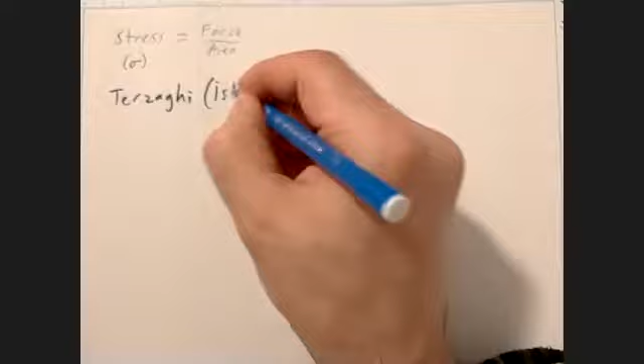This worked to some extent, but people needed something more to model the behavior of soils. So for that purpose, what the person viewed as the father of soil mechanics, Karl Terzaghi, came up with is this. A little interesting bit of trivia: he was working in Istanbul, Turkey in the early 20s, so you can consider soil mechanics was kind of born in Turkey.

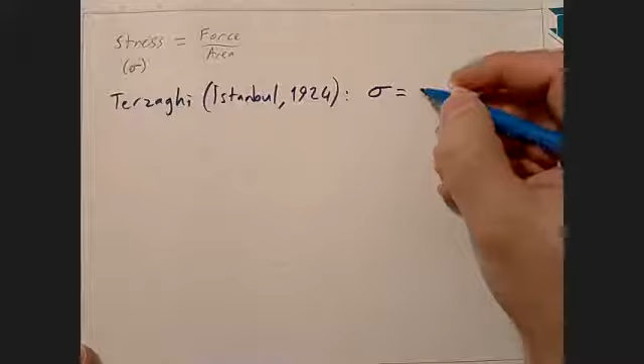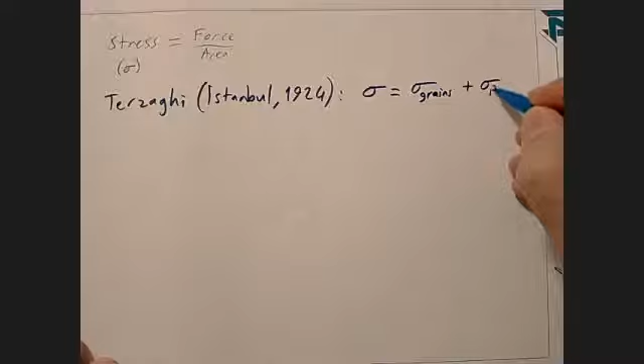He considers the total stress in the soil has two components: a stress component carried by the grains, and the rest carried by the pore fluids.

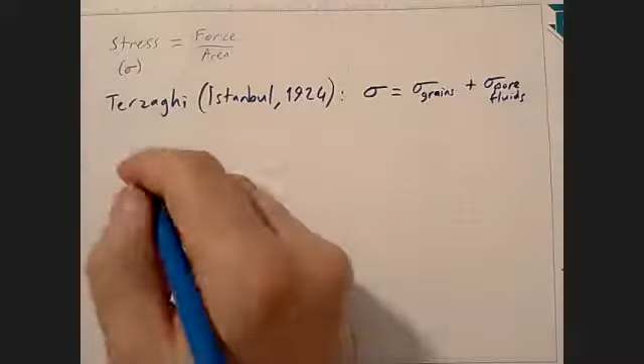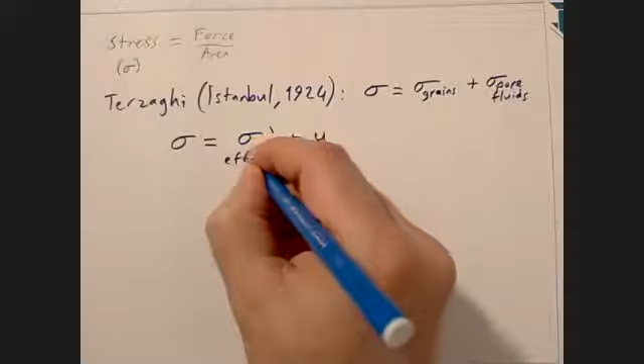Actually, he didn't say that, he didn't write it that way exactly. What he wrote, what he postulated, was this: where this first term, the sigma prime, is the stress carried by the grains, and he called that the effective stress. So it is the stress carried by the grain matrix or solid skeleton.

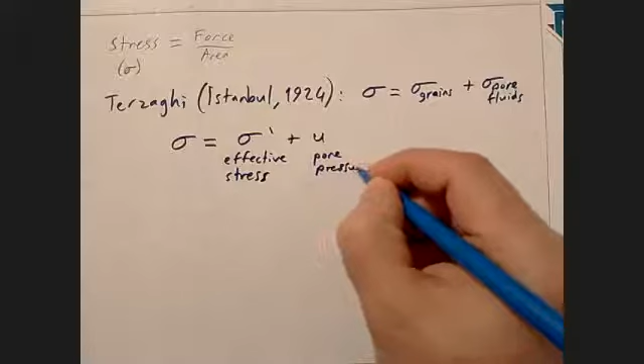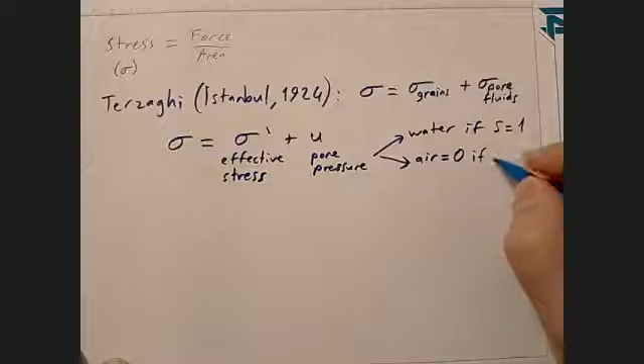And this is the pore pressure. He separated that into water, if saturated, and air pressure, which is zero if dry.

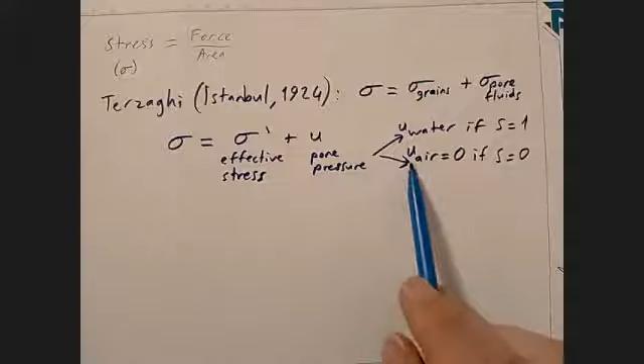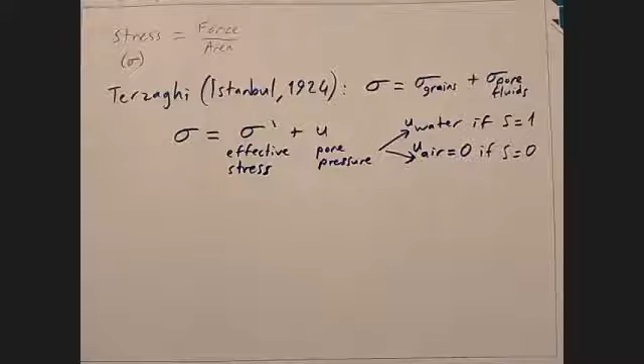Let's write it this way. Quick side note here: when we say pressure of air, of course pressure of air is atmospheric pressure, which is around 100 kilopascals. But that's for scientific calculations. If you are going to use the ideal gas law, you need to consider air pressure to be 1 atmosphere. But for engineering and mechanical calculations, you can use gauge pressures as well.

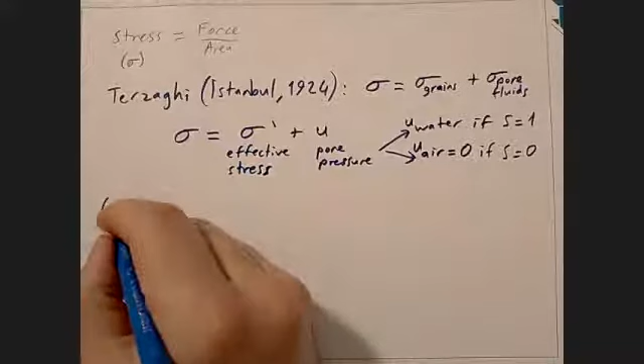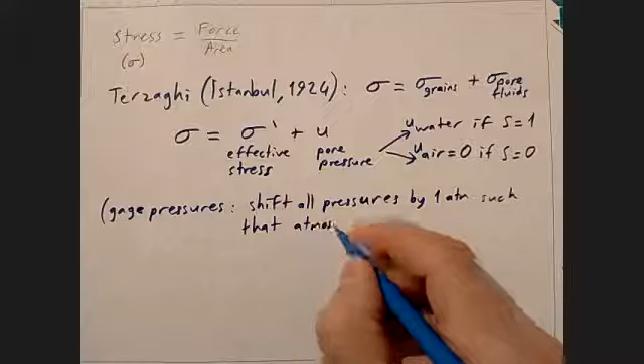Gauge pressure shifts all pressures by 1 atmosphere, such that atmospheric pressure is 0.

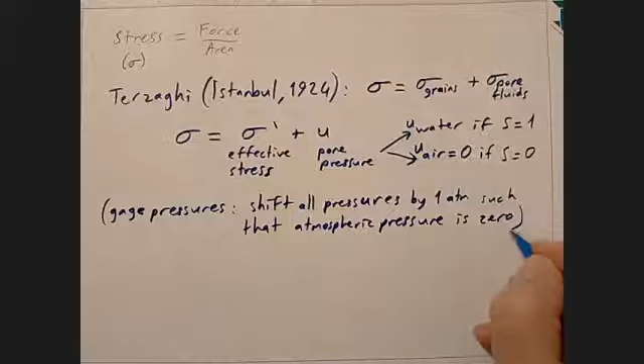The purpose of this is because when we are analyzing conditions where the air pressure isn't going to change, which is usually the case for many civil engineering projects, there is no point in adding one atmosphere to everything. You have one atmosphere inside the tank, one atmosphere outside the tank - they are going to cancel anyway. All those atmospheric pressures are always going to cancel. So for that purpose, we use gauge pressures instead of absolute pressures.

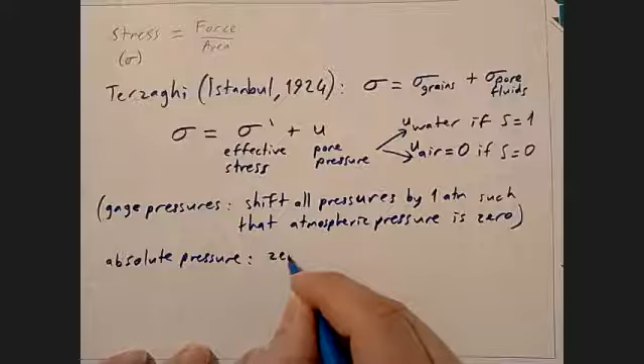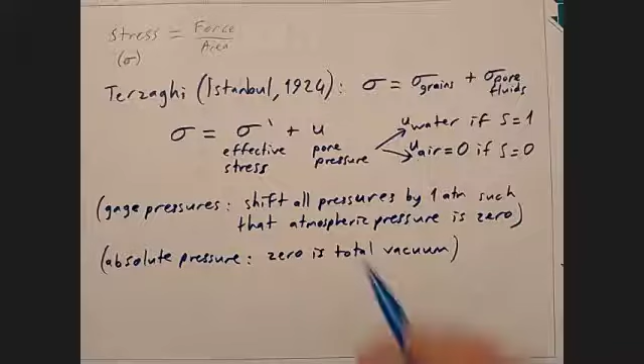Absolute pressure is what you learn in science, where 0 is total vacuum. So we shift all absolute pressures by one atmosphere.

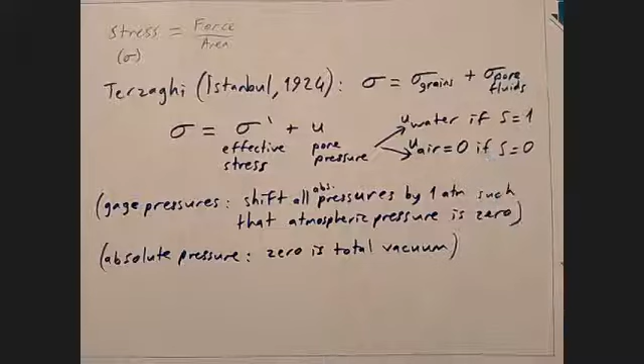That is why if you have dry soil, the pore pressure is 0 - because yes, it is one atmosphere, but it acts on all grains from all sides equally, so it is going to cancel for every grain.

So what about effective stress though? Effective stress has the solid skeleton's contact stresses involved, and also a double layer repulsion component.

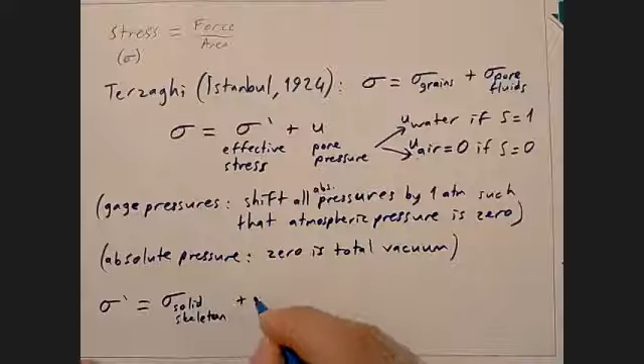Remember, when we were talking about clay particles' ability for holding water, we discussed these double layer cushions of water, and said these cushions can transmit stress from grain to grain without the grains touching each other. So that's what this is - if two double layers are pressed against each other, they are able to carry this stress without the solids touching each other.

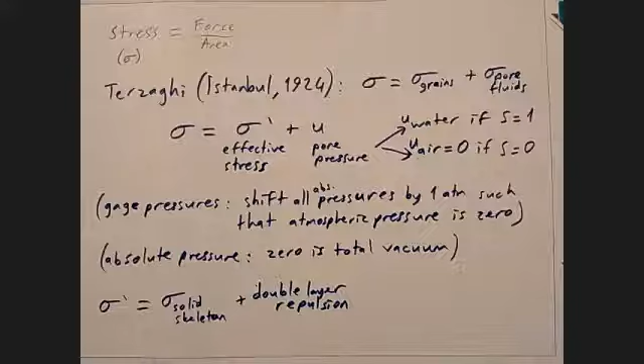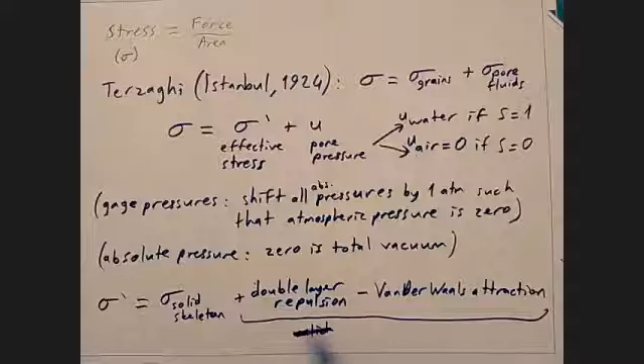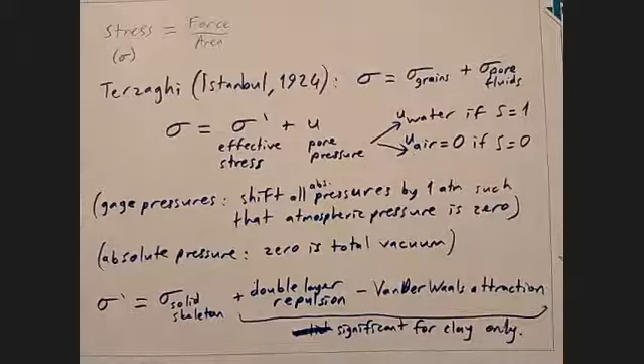When you go down to clay scale, this even becomes significant - of course, these two are significant for clay only. But anyway, in the end, the overall meaning of this is that it is the stress carried between the grains.

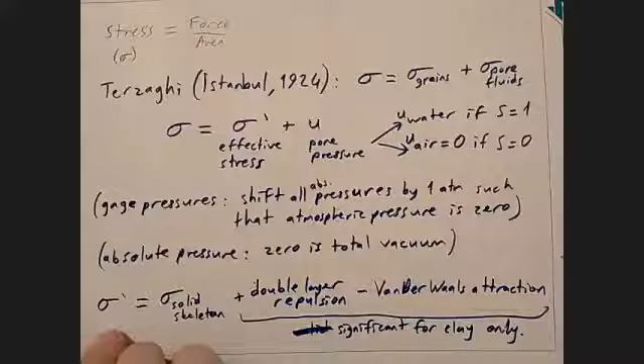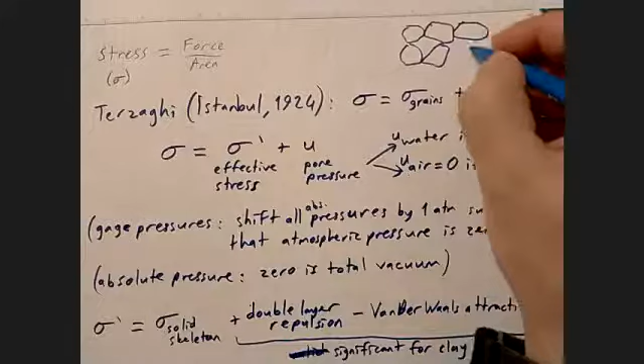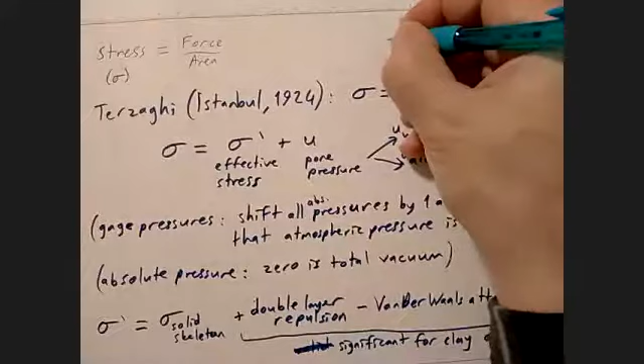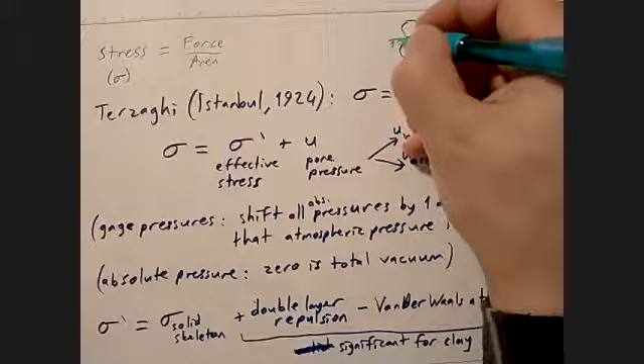So basically, it is something like this. So you have these grains for a granular soil, you can think of it as such. You can consider over this area, you are going to have your fluid forces, and imagine contacts are infinitely small, so they occupy almost no area there. And then you also have these contact forces.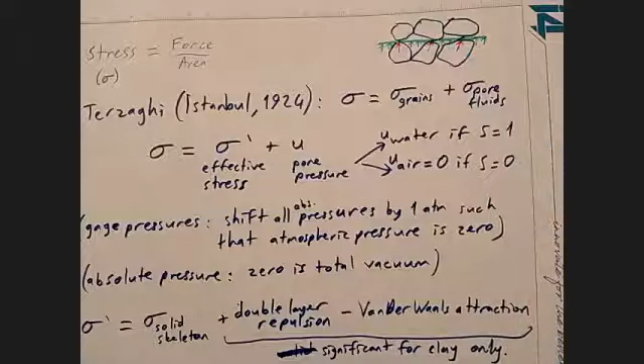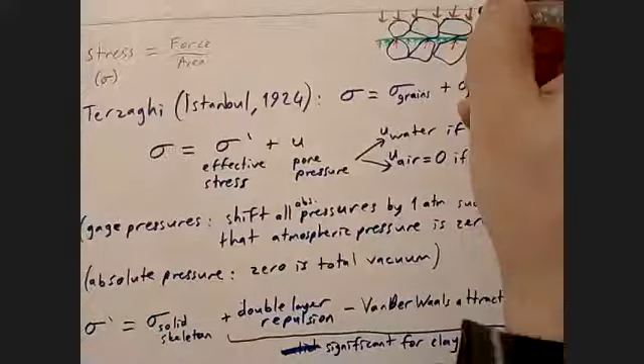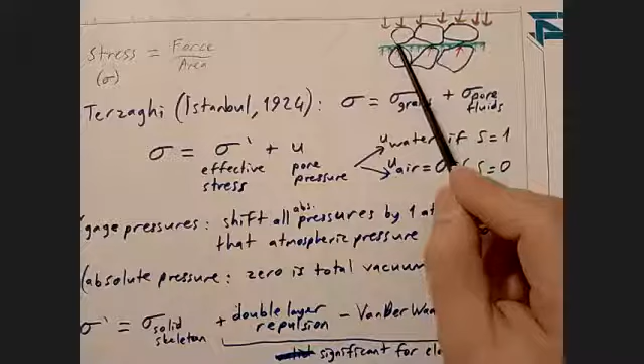So you can consider the total stress carried by the soil is going to be the stress acting on the entire soil area. And as you can see from this figure, the pore pressure, the pore water, or actually air as well, also acts on the entire soil area. So the way the effective stress is defined is it's also defined over the entire soil area. So it is not the stress inside the solid of the grain. It's not the stress at the contact. It is kind of like the resultant of all these contact forces divided by the entire soil area. So it is like average stress. That's how you can superpose stresses. They have to be acting over the same area to make this superposition.

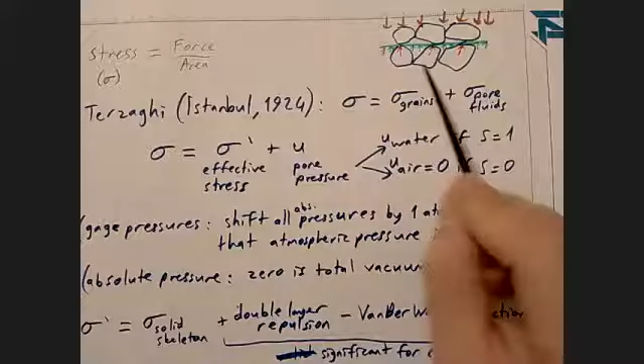So keep that distinction in mind. It is not the stress in the solid. It is more like a conceptual stress that is a component of the total stress in the soil. So that's why it's called effective stress.

So how do we calculate it then? Let's consider a column of soil like this.

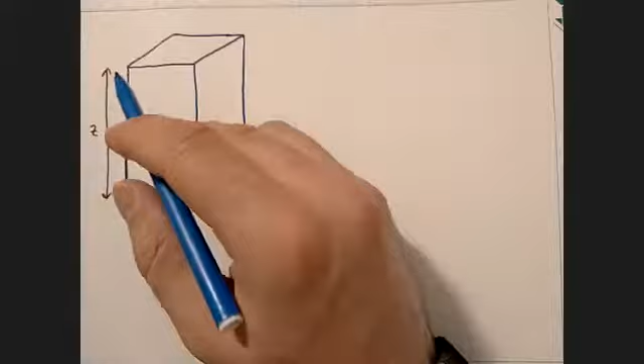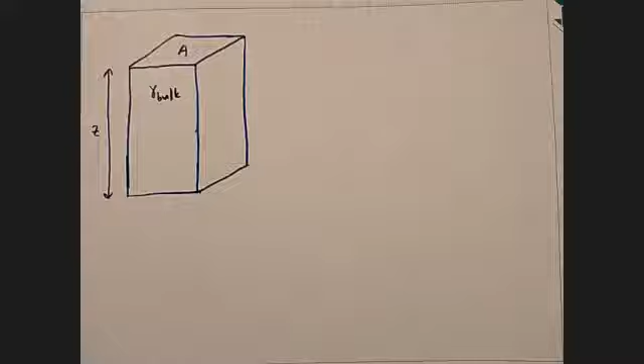So here is my column of soil. And let's also put some dimensions here. Let's have it this much deep, and let's have it with an area of A, and let's have it with this much unit weight. And also let me do this so that it looks like a rectangular prism. Okay.

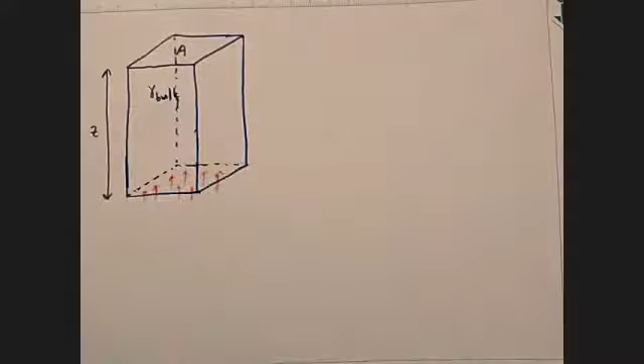So let's say we would like to calculate or figure out the stresses at the bottom, the vertical stresses. So the weight of this soil is carried by the vertical stress. So I can write directly that vertical stress is weight over area. And here for this particular figure, by the way, I'm going to be writing many equations here, but they aren't formulas or anything. They will be specific to what I draw.

So the weight of this is volume, Z times A times unit weight, divided by area A. Look what happened. It becomes Z times gamma. So wait a minute. The total vertical stress is calculated similar to hydrostatic pressures of a fluid. That's interesting. So you can pretend the soil was a liquid with that same density, and then your vertical stress calculations would still be the same.

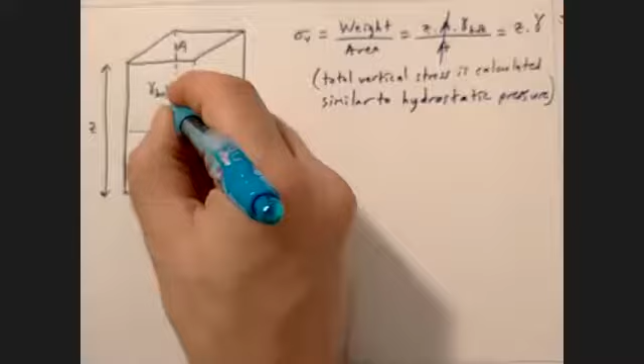Now, let me add a level of complication to this. Let's add groundwater to this picture. This icon, this mark, designates the level of the groundwater inside the soil. And let's have it at a depth of, or at a height of ZW. Actually, we are talking in terms of depth, so let's call this ZW, so this would be Z minus ZW.

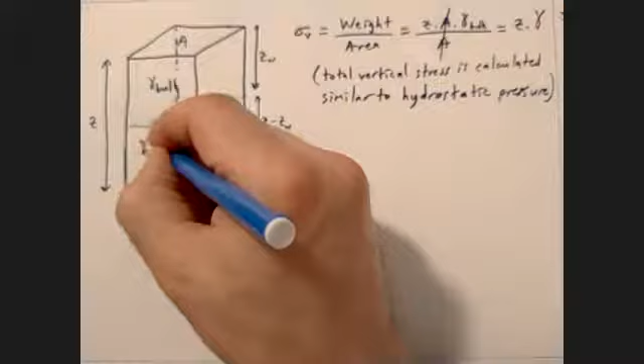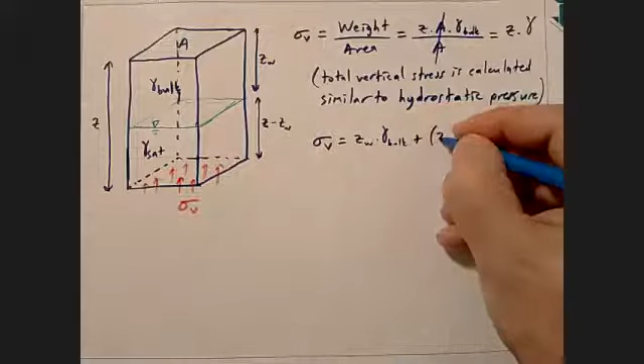Let's look at this again. Now what have changed is, first of all, we changed the unit weight down here. Now the unit weight down here is gamma saturated. So my total stress becomes sum of all weights divided by unit area. So the area is always the same, so the area will always cancel out. So what we have now is this.

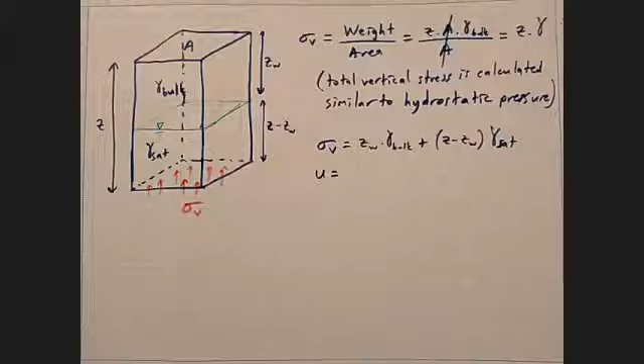And how much is the pore pressure down here? Now we are at this depth from the water surface. Now, yeah, there is soil inside that as well, but the soil grains there, they are just shaping the pores for your fluid. So actually it is just like a very intricate container in which you have water. So your water pressure will also be this depth times density. So it will be Z minus ZW times gamma water, which makes your effective stress, vertical effective stress, which is, as Terzaghi says, this much.

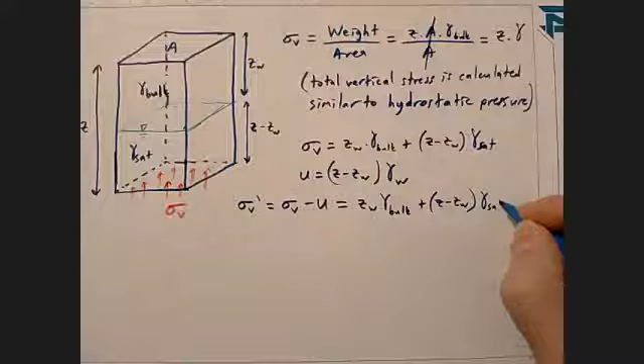And if you subtract from that, if you subtract this, you end up with ZW gamma bulk plus Z minus ZW gamma submerged. So that's called gamma submerged here.

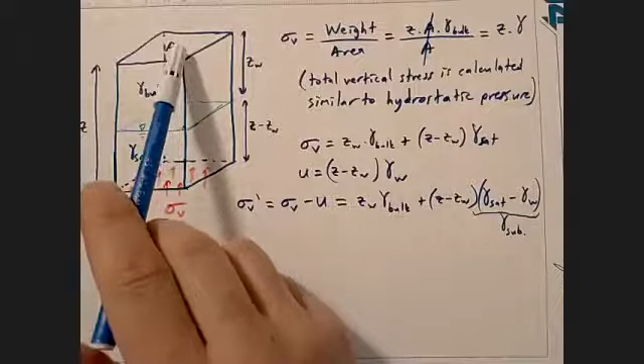Let's see what we have done here. Let's add one more little detail. Imagine if you had some additional load on the top, what would that do? It would just increase the total stress.

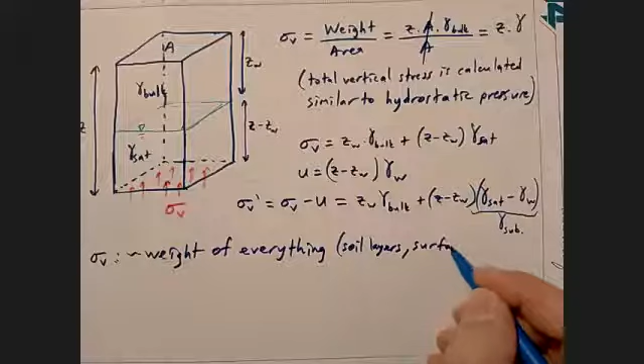So the vertical total stress is weight of everything above, and with everything, we mean both soils and loads.

U, as we already said, 0 for dry, hydrostatic for saturated.

But let's put a note here. I said hydrostatic. What does that mean? Hydro, water, static, stationary. If the water is stationary, unless there is flow.

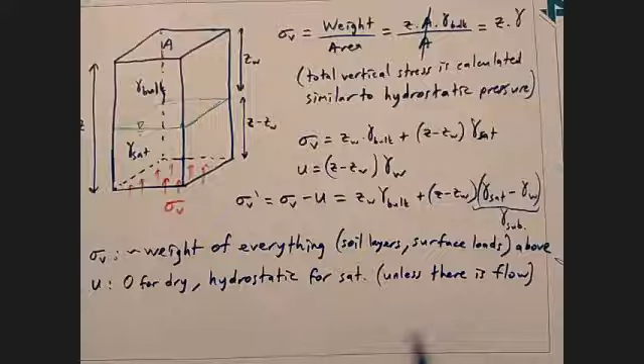So I'm going to leave it at that right now. We haven't covered the flow chapter yet. Once we cover the flow chapter, we are going to go into that as well. But right now, until then, we are going to be looking at only hydrostatic groundwater problems in this section.

And the effective stress is always this. Why is it so? Because it is defined as such. Remember, effective stress isn't some real stress that you can measure somewhere. Its definition is this. So this concept is called Terzaghi's effective stress principle.

So this never changes, unless in some cases it does. But anyway, for this course, this is going to be the case. When does it change?

If you have noticed, I always kept writing for pore pressure, 0 for dry, hydrostatic for saturated. But what if it is something in between? Well, if it is something in between, this doesn't hold anymore. So if it is a partially saturated soil, unless the soil is partially saturated.

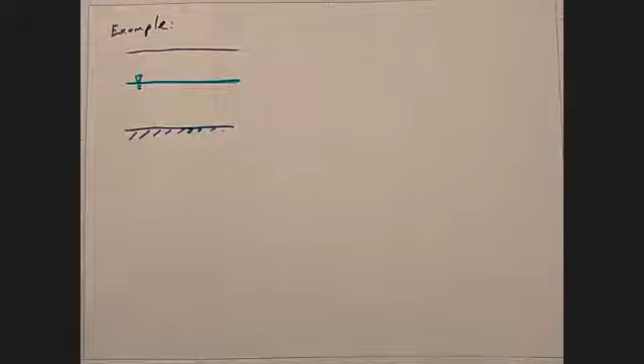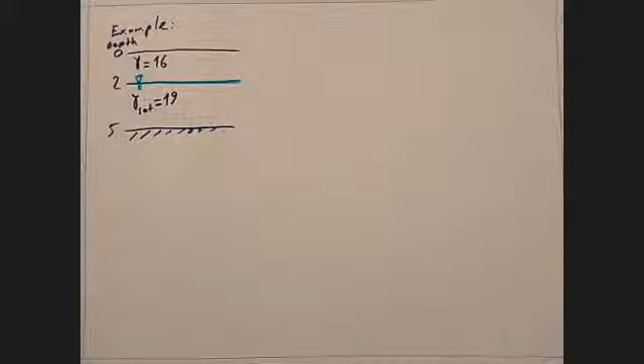So here is my water level, and here I have some soil where up here my unit weight is, let's say 16. Down here the saturated unit weight is 19. And basically here is the depth scale, depth in meters, 0 to, let's say 5. So let's say this is the end of our problem. Actually, it doesn't have to be an actual end of layer. It can simply be the depth up to which I want to examine this. So actually you can even consider it like this.

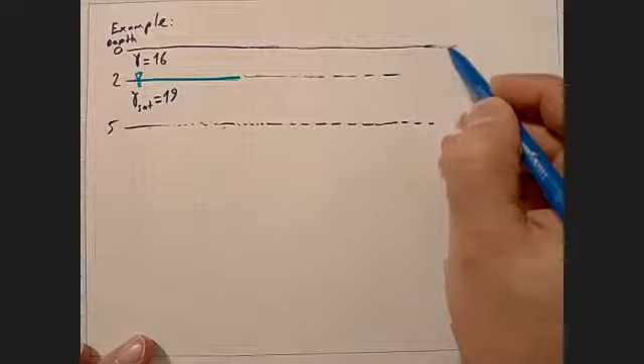So the question here is going to be, calculate everything at all depths. So calculate the vertical total stress, effective stress, and pore pressure at every depth.

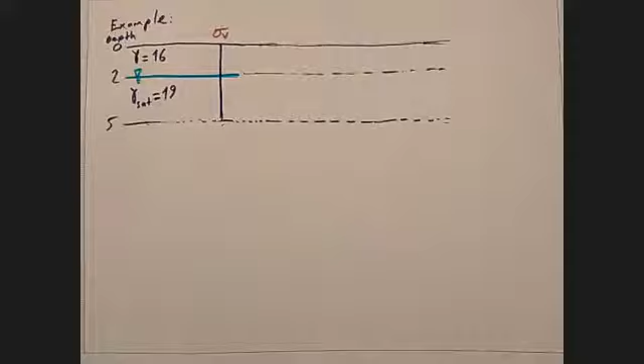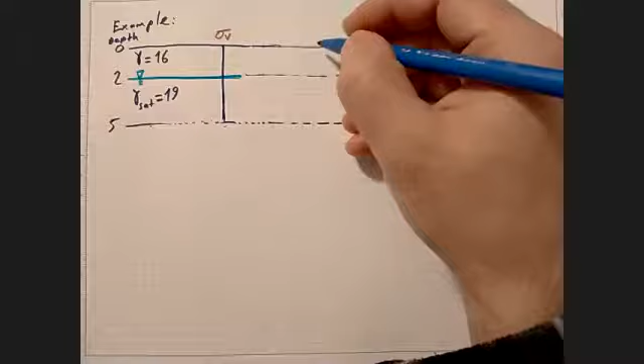So let's start with total vertical stress. And we can do that. The best way to do that is as a distribution over depth. So yeah, for a specific problem, you can end up needing the stress values for only a single depth. But most of the time, for most engineering problems, it's going to be much easier to visualize things and follow what is going on if you consider things in terms of a distribution.

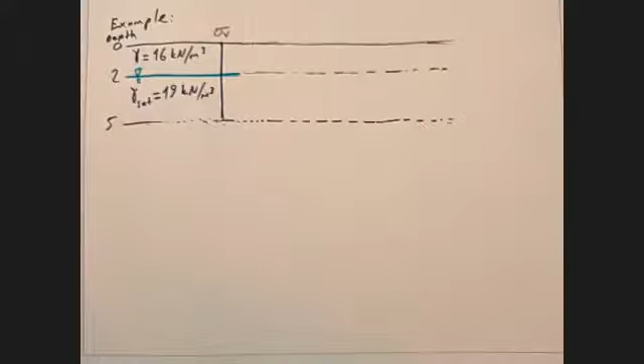So at the very surface, there's nothing above that. So the weight is 0. Weight above is 0. So the total stress acting on the surface is 0. Then as I go down, for every meter depth, I'm adding a unit weight of, I'm adding a weight of 16 kilonewtons. So per area, that would make 16 kilopascals. So in 2 meters, I'm going to get 2 times 16, 32 kPa.

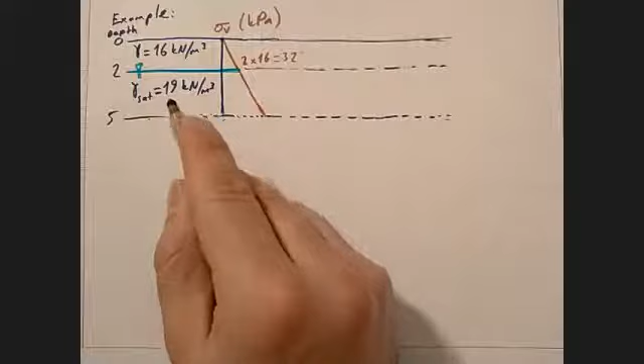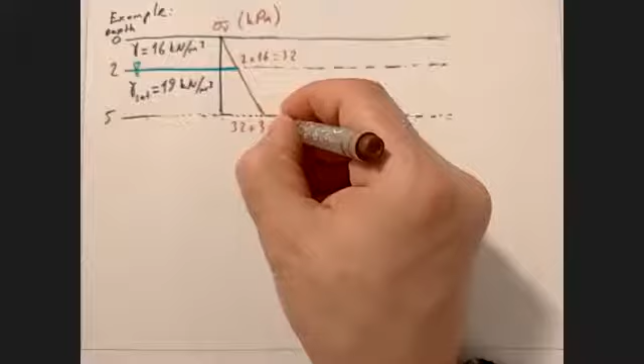And then beyond that, between 2 and 5 meters, at every meter I'm getting 19 kilopascals added to the equation. So 32 plus 3 times 19. What's that? 57, 89.

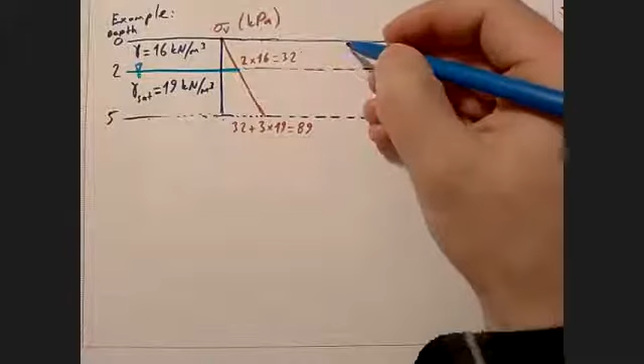So it is still just like fluid pressures, but instead, this time you have two immiscible fluids that have different densities. So imagine you had water and oil on top of each other, and then this would still be how pressure in that fluid would be distributed.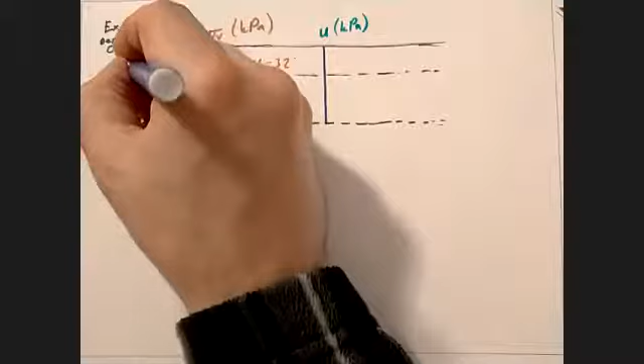So next, let's consider pore water pressures. Everything will be in kPa, all the stresses, because all of them are stresses. So up here, where the soil is dry, your pore pressure is going to be zero. Remember, if it is just air, it is zero.

And then below here, basically this little sign, this triangle, upside down triangle with its reflection, it always tells you at this level water pressure is zero. So here it is zero as well. And then the rest is hydrostatic.

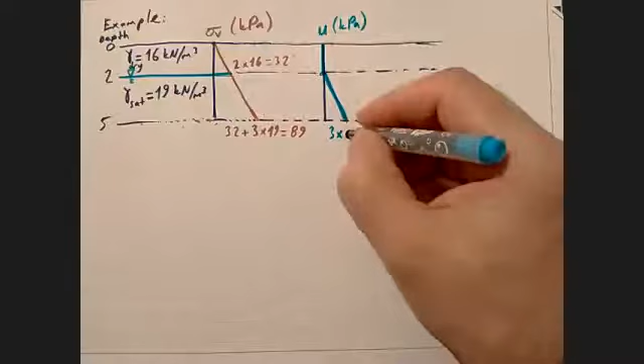Therefore, 3 times gamma water. In this chapter, I'm going to be using 10 for gamma water for simplicity of calculations.

If you want to be more precise, you can go ahead and use 9.8. By the way, a little side note, using something like 9.81 or 9.807 is going to be more precise, but not more accurate, because here in Ankara, due to our latitude as well as our elevation from sea level, the gravitational acceleration is much closer to 9.800 compared to 9.807.

Just an additional little trivia.

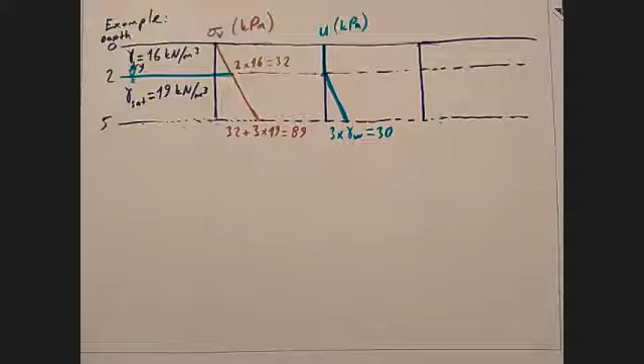So finally, let's look at the vertical effective stress in kilopascals. This one is always going to be total stress minus pore pressure, as we said. So here it goes. Here it is 32 minus 0, that's 32.

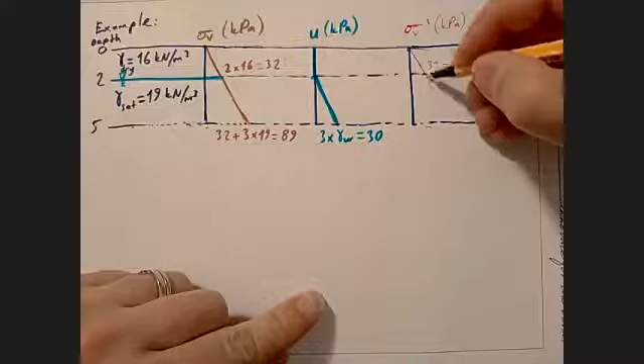And then the slope changes, because up here it was going at a slope of dry unit weight or bulk unit weight. Here its slope is the submerged unit weight. Why? Because I'm subtracting from the saturated unit weight sloped line, a line with a slope of gamma water. So the result is a line with submerged unit weight.

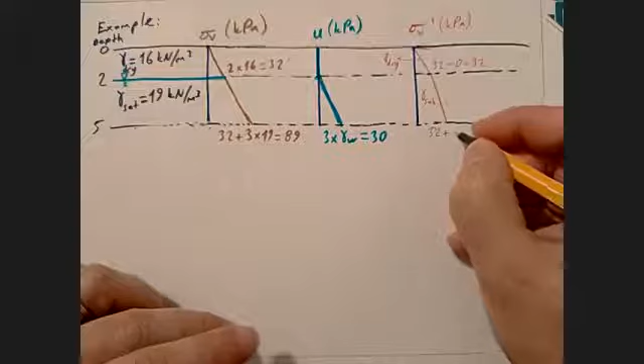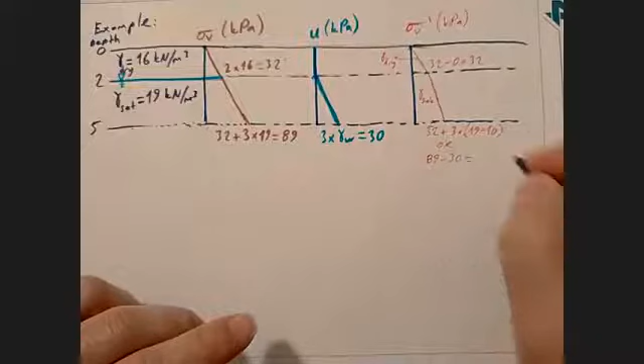You can either think of it that way, so that would be either 32 plus 3 times 19 minus 10, or you could also think of it as Terzaghi's effective stress principle, which I really recommend. It is much easier to think that way. And either of them are going to make the value 59.

So this is basically what we are going to be doing in this chapter, but right now it looks very straightforward, though there are many other possible complications I could add. So let's add a few more of them.

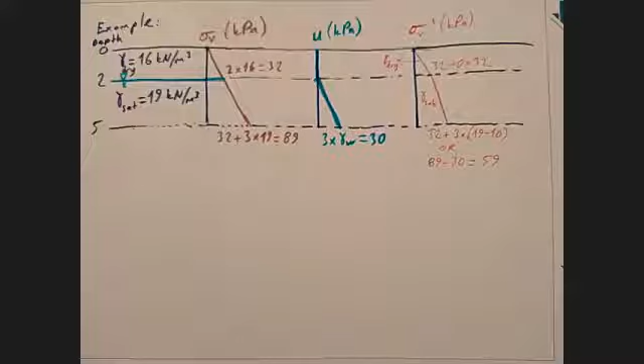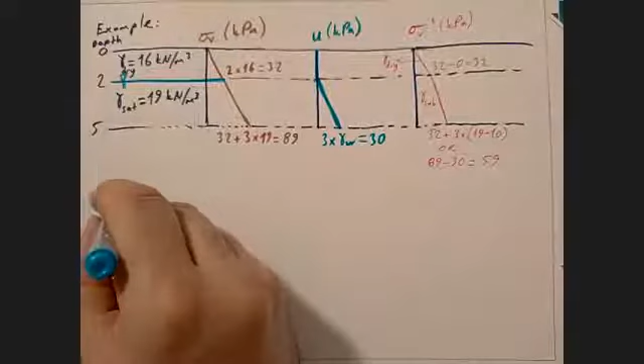Now, another example is, what if I have this? Let's say I have some sort of water body, let's say it's a lake, and this is a 2-meter deep lake. And then let's do our calculations down to, again, 5 meters.

So actually I'm giving the same geometry, but this time I'm just switching such that you have just water here and soil here. And let's use the same gamma saturated. So let's do the same exercise here.

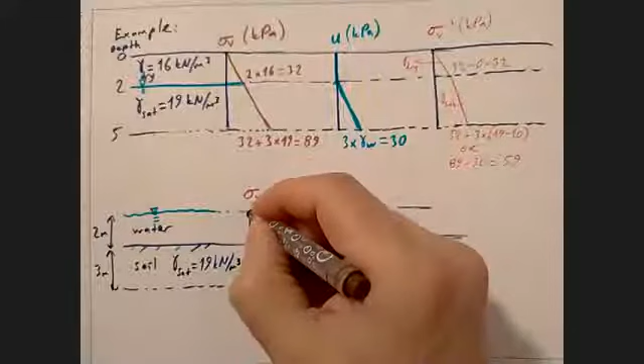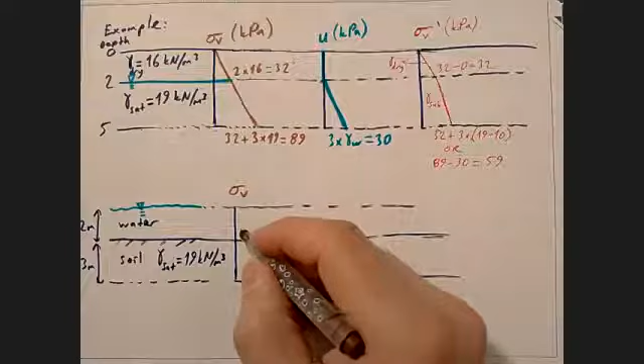Okay, so again, at the surface, it is going to be 0. How much will it be in the water? Now remember, this is the total stress. And its definition, we defined it as, or we summarized it as, weight of everything above. So as you go deeper in the water, water's weight applies stress. Therefore, what you get is here 2 times 10, 20.

And then the slope increases down here, 20 plus 3 times 19 is, sorry, 77.

Let's look at the pore pressures. This time, remember, this is my water surface, so it is 0 up here. So here it is 2 times 10, here it is 5 times 10, because we are looking at a hydrostatic case.

And lastly, the vertical effective stress. Up here, there is none. Down here, effective stress principle says 20 minus 20. This is also 0. Why is that? Because up to this point, there are no grains.

Remember the vertical effective stress, the effective stress is the stress carried by the grains. So in the lake body, there are no soil grains. So it just goes like this. There's nothing with grains up there. Then the rest is, so here it is 20 minus 20 is 0.

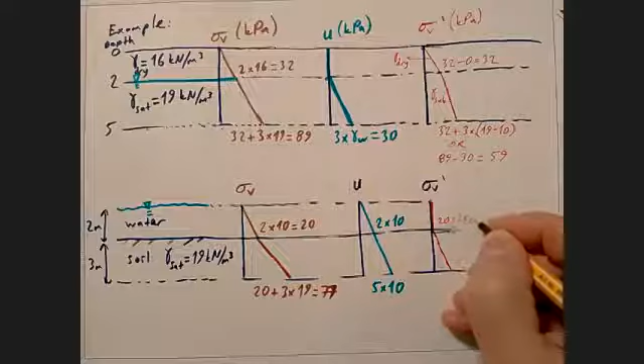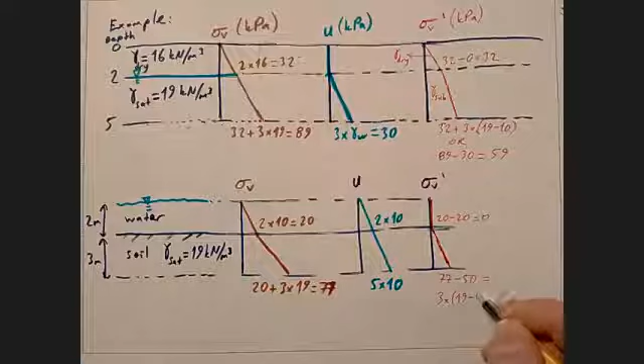And here it is 77 minus 50, which is also 3 times 19 minus 10, both of which make 27.

So basically, this is the idea. It's always, these stresses can always be calculated in such a way.